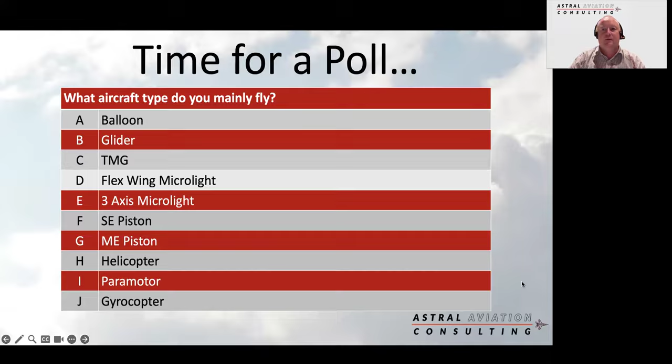Excellent. I know we had some questions as to whether the gyro flying aspects might be relevant, but as I think I corresponded with some of you by email, for some of those other types, the startle factor stuff is still really, really relevant to you flyers out there. So it's great to have you with us this evening as well.

Without further ado, I'm going to hand over to Greeners to talk about flight upsets, and I know he's going to start with another poll as well. Thank you very much. Well, let's have a look at the poll then, shall we? So

To start off with, we're talking about flight upsets, but what do we understand by flight upsets? What is a flight upset? So there's a bunch of questions there. Is it where the pitch attitude exceeds large degrees of nose up or nose down? Is it where the angle of bank exceeds 60 degrees? Is it where the aircraft is about to stall or has stalled, or any time the airplane isn't doing what you expect it to do? Now, there may be a perfect answer to this, or there may not. So what I'm really interested in here is generating some thought about this. So please put down whatever you think is the most appropriate response.

So I feel there should be some background music, maybe some Top Gun stuff. I don't know. Maybe that's not appropriate.

So looking at the results there, it's a really interesting one, because when people started talking about flight upsets, there was, in a document called the Airplane Upset Prevention and Recovery Training Aid version 2, a set of definitions about what constituted a flight upset. And those definitions were outside of 45 degrees angle of bank, more than 25 degrees nose up, or more than 10 degrees nose down. But the difficulty with that, amongst other things, was that if you're in that V-shaped box, it suggests you can't be in a flight upset.

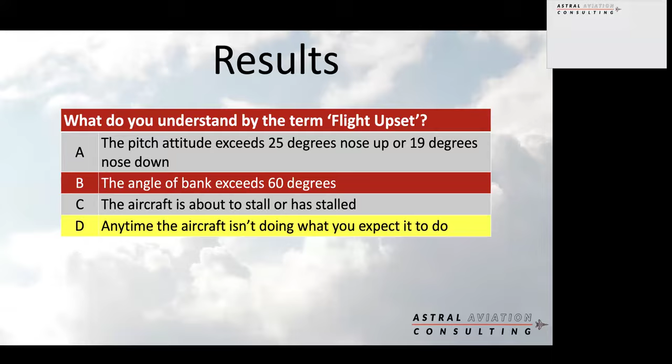So as GA pilots, all of those things might constitute a flight upset. If the aircraft is about to stall or has stalled, it may well be a flight upset. The presenters had an interesting debate about this. I've got to grab my airplane now, sorry. The bottom line is, an airplane flying along straight and level might be in a flight upset if that's not what you're expecting the airplane to do. So really, we define a flight upset as any time the airplane isn't doing what you expect it to do.

For aerobatics, if you're exceeding 60 degrees angle of bank, it's not a flight upset. If you're practicing a stalling exercise, it's not necessarily an upset. Although if you're not expecting the airplane to be stalled, then it is a flight upset. But basically, anytime the airplane isn't doing what you expect it to do. Thank you. Okay, and that's using that definition.

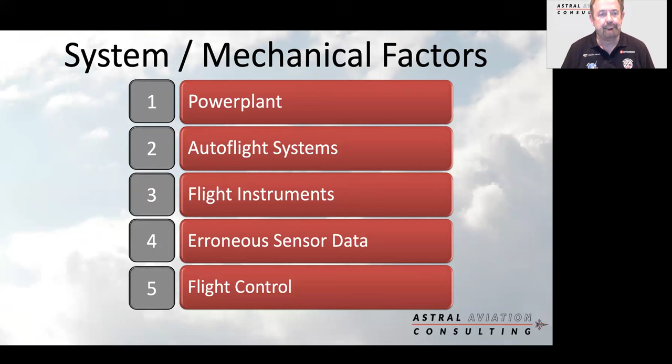And then finally, and the biggest set of potential causes of flight upsets, are human factors. This probably causes the bulk of flight upsets for us as GA pilots. So system alerts, disorientation, loss of situational awareness, passenger distraction or interference can be a big cause of potential flight upsets. Fatigue, overload or complacency, sort of 3 different categories grouped together there. But yeah, fatigue is an issue in our world as well as it is in the commercial world. And lack of understanding of angle of attack. Now, this last one in particular is one that's going to ring a lot of bells, hopefully, for people.

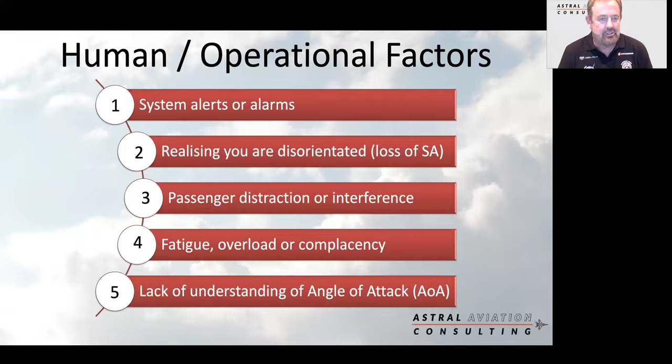So let's talk about what is angle of attack. So angle of attack, as I'm sure everybody in this webinar is fully aware, is where the relative airflow meets the mean chord line of the wing. And aeroplanes don't stall at a particular speed. They stall at a particular angle of attack, and sometimes speed can largely be irrelevant. And the airplane doesn't care what the attitude is, it's only concerned with what the angle of attack is.

Okay, so this is a lovely chart. This is from the Airplane Upset Prevention and Recovery Training Aid version 3. We've got 3 airplanes here at the same pitch attitude. The middle airplane is flying straight and level. It's got an angle of attack. The airplane on the left-hand side is climbing, same pitch attitude as the middle airplane, but it's got a smaller angle of attack. And we can have a long chat about that, but basically the relative airflow is now kind of coming from above the airplane. So the angle of attack is less on that climbing airplane than it is on the straight and level airplane.

But the really important one is the airplane on the right. That's a descending airplane, again, same pitch attitude, but because it's coming down, the relative airflow is coming from underneath the wing. And so the actual angle of attack is bigger than the other 2 airplanes. So that's really important to us. If we're descending and we've got a high angle of attack and we're in a stall, then we might have to make a very large change to the pitch attitude to get the angle of attack to a position where the airplane is actually flying effectively again.

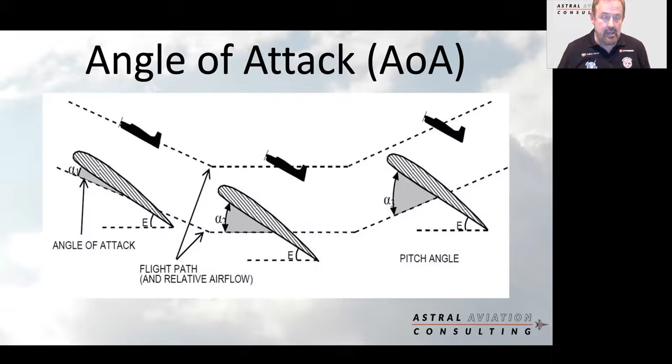So, just to finish off this little piece here, what is the largest cause of fatalities in general aviation? Well, it's what we're talking about tonight. It's flight upsets resulting from loss of control in flight, by some margin, and it has been for a number of years. Okay, so some of the stuff we're going to talk about later on, again, it's a gallop through because we're not spending a huge amount of time on this. When people come to us for their GA UPRT courses, we'll probably spend 4 or 5 hours on the technical knowledge side as well as the time in the airplane.

But loss of control in flight is the largest cause of fatalities in general aviation. So that's really important. So this whole session we're talking about tonight is absolutely critical. Thanks, Matt. Great, thank you. Really great scene setter there.

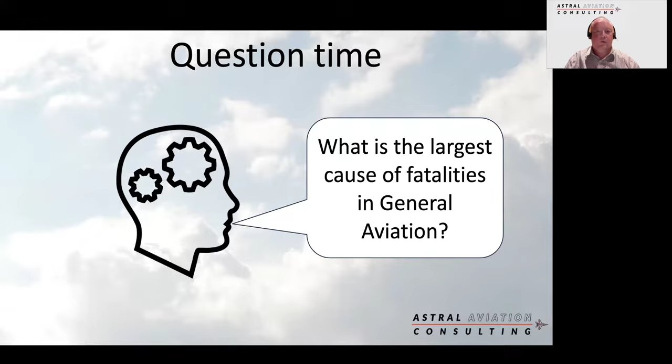Thank you very much. We're now going to move on to Nigel's talking about how to stay in control. And we're going to look at some startle factors, so that'll be really interesting as well. And then looking about what happens if it all goes wrong, that far right hand side of the arrow as Mark showed us. But Nigel, over to you.

So how to stay in control. So in our usual way, we're going to start with a quick poll, and we're going to come back to this particular poll. So let's have a look at this question then. So when turning base to short final, the tailwind on base leg results in the aircraft going through the extended centre line of the runway. So what's the best course of action to take? Bear in mind, we're on final to land here.

So do we increase the bank angle to tighten the turn back to the centre line? Do we increase the rudder application to tighten the turn back to centre line? Or do we do both of those things? Or do we roll the wings level and go around? Okay, so like I said, a practical question, and let's just see what people have come up with then. So let's have a look at the answers,

and they are good. Okay, so the majority of you have gone to roll the wings level and go around. About 22% of you have said C, you do both A and B, and a minority of people have done just the individuals of rolling or applying the rudder.

So the correct answer, of course, is we should roll the wings level and go around, because if we do A, that's going to increase the load factor, which is basically going to increase the angle of attack that Greeners has just been saying. B is going to provide us with possibly an out of balance turn, so we're going to introduce yaw, and if you do both A and B together, worst case scenario is you're going to spin. Okay, so D is actually the correct answer there. We should not attempt to get back onto the centre line. We need to keep in control.

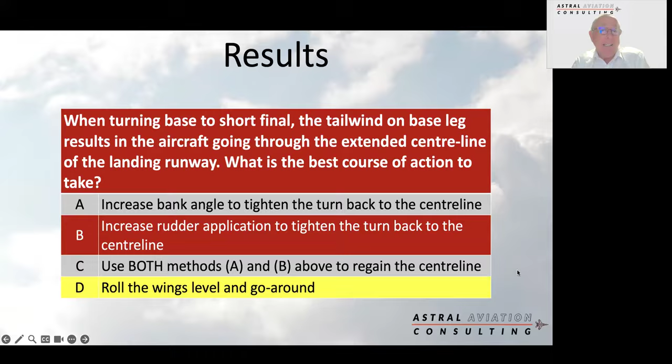So let's take a look at the best ways of doing that then. So like all good things in aviation, if we follow good procedures, then we're less likely to find ourselves in a bit of a pickle. Okay, so we're going to quickly chat about situational awareness. We're going to talk about work cycle. We're going to talk about energy state awareness and angle of attack. Well, Mark Greeners has just talked about that really, so we'll be talking about what energy state awareness means, and a bit about decision making and some prioritization.

So let's take a look at the first one of those then, situational awareness. We have chatted about this before at various points on our seminars, but so what is situational awareness? Well, put simply, it's having an accurate perception of everything around you. So how do we do that? Well, that's helped by planning ahead, listening to what's going on, feeling to a certain extent what's going on, and looking at what's going on. Looking out has been a good example there for VFR GA pilots.

Think about the what ifs. Aviation's got a special name for that, the what ifs. It's called threat and error management. It's basically a risk assessment. That's just another name that aviation uses for it. And then think about the what's next. So fly the aircraft, but think ahead. Things like, how am I going to join the circuit? So all of these things mean that we're not going to do something impulsive.

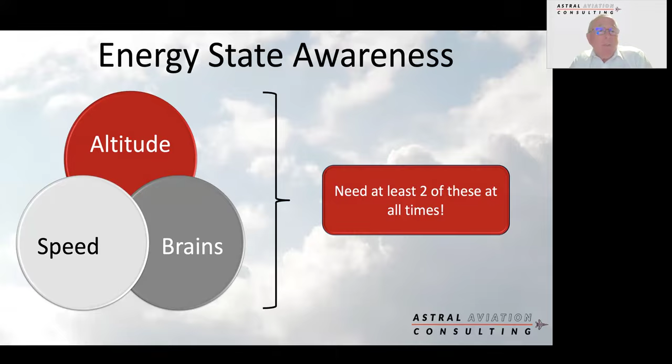So just before we move on to the next session, let's have another quick poll. So this one's an interesting one. For those of you that fly an aircraft with an autopilot or an electric trim, how many of you have an item in your vital actions prior to departure checklist, those last things you do before you depart, that identifies the controlling circuit breaker for either the autopilot or electric trim? So the answer is yes, you do have a checklist that says that. No, you don't, or perhaps you don't fly an aeroplane with autopilots or electric trim. So hopefully that's pretty quick to answer. So let's have a look at the results then.

Okay, so there's a fair number of you, 62%, who don't fly an aeroplane with that equipment. Okay, that's the majority of the people. Of those left, 26% say you don't have a checklist that does this, and then only a very small percentage, 11% of you, say that you do. So what we're saying there is just an example of coming to terms and thinking ahead about stuff so that we don't have to end up dealing with an out of control situation.

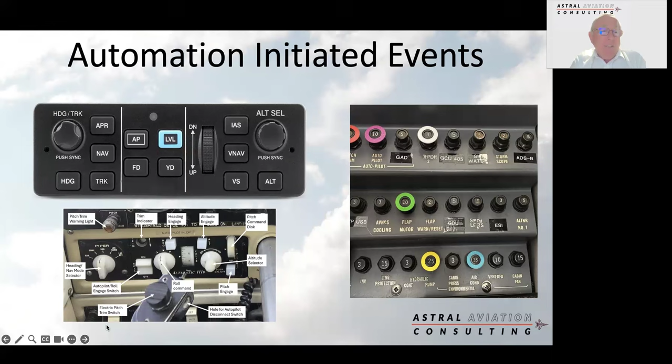So let's have a quick look at decision-making and prioritization. We've talked about cognitive bias, really, and just to come back to that, cognitive bias is stuff that affects our normal decision-making, and the thing that gives us poor performance in that area, if you like, is confusion. That happens because we've got poor situational awareness, ambiguity, poor communications. Typically, that's in a multi-crew environment, but I'm sure Greeners is going to talk about that when he talks about the commercial aspect of this, just for your interest as a GA pilot. Poor comms can also be poor RT and confusion between RT and ourselves.

Memory lapses, that comes from poor briefing. If we've revised this vital information just before the flight, these key pieces of information like where the circuit breaker is, okay, then we are briefed appropriately. High workload: when the unexpected happens during a period of concentration, such as pre-landing checks, that's when it comes as an even bigger shock. And again, we're going to talk a little bit about startle factor later on too. Urgency is another one, where time is a pressurizing factor. Maybe we need to meet our slot time for a departure or for a landing, so we're rushing. Okay, that does not help anybody.

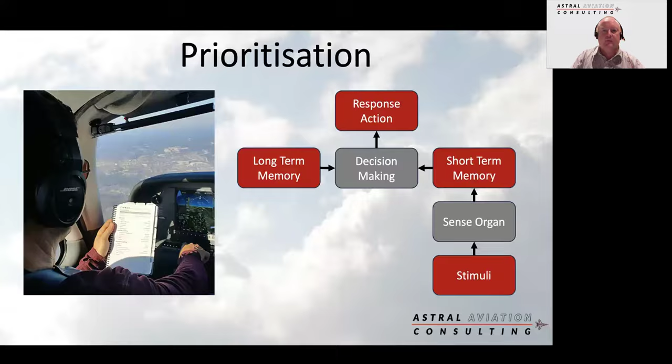So Startle, for me, this is the critical part of the whole session this evening. By far and away the most important factor to take on board. Startle is a killer. I think we're just scratching the surface here, and I think the industry has done itself something of a disservice by referring to this issue as Startle, because Startle sounds a little bit soft and fluffy. It's the sort of thing that happens in a horror movie. But make no mistake, this by far and away has the potential to be the biggest killer here in terms of the impact that it has on us.

And very quickly, what's the difference between startle and surprise? Surprise is when you go to your home and you find that a friend has thrown a surprise birthday party. Startle is you're walking through the door and a whole bunch of fireworks and explosives go off behind you, and for a period of time you're unable to deal with what's going on. So what is Startle Factor?

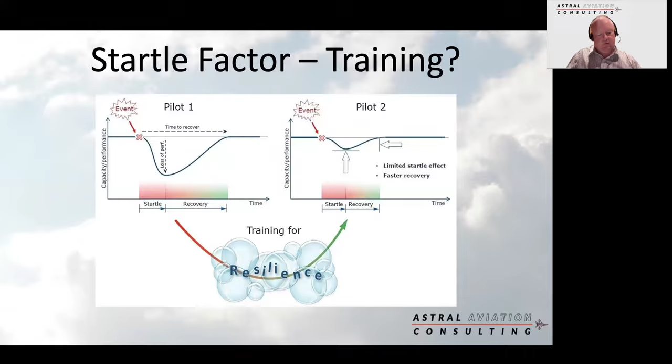What we're going to do next is move on to what to do if you end up out of control. And then we're going to look at some of the commercial UPRT, just a bit of interest in there as well. Another poll just to keep you interested before I do this next section.

So question here, if we can have the questions up, please, Sophie. What does the bottom of the white arc on the ASI, airspeed indicator, indicate? What do people think? Flaps limiting speed, flaps up stall speed, flaps down stall speed, or the rotate speed. I'll give you a freebie hint as well. Any of you that are doing FI or CRI courses or thinking about this, you'll do questions like this. It's definitely the kind of thing you can read up on before doing your courses and save yourself some stress. But let's have a look at the results, please.

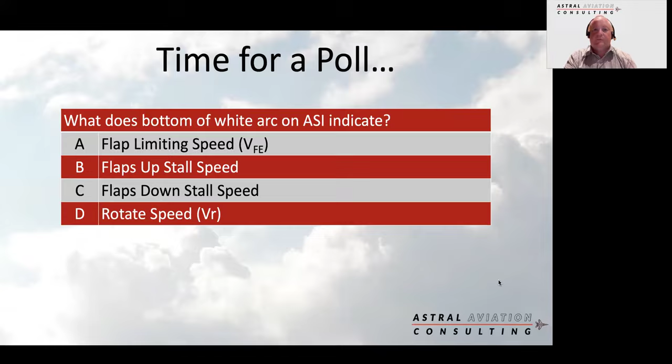Okay, so we've got a bit of a mix of results. The actual answer is C. It's the flap down stall speed, and that's in the landing configuration. So actually, it's well worth going and having a look at your ASI and the markings and just refreshing yourself as to what they all mean. There's actually some really interesting information on there as well.

I was doing a test on an aeroplane that was a single, but it had a blue line marking. Now, most people flying twins are familiar with what the blue line is, but there was also a single with a blue line marking on there as well. So here you go. If you're bored or struggling to think, you might go away and do some research. What do you think that meant? Or we can give you the answer at the end.

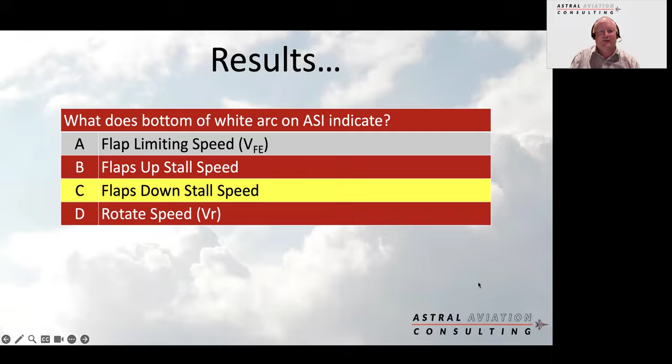So what to do if you end up out of control. Now, let me be upfront and clear. What I'm going to discuss here is the current training advice from the CAA. Some of you may be aware there are ongoing discussions about potentially updating and evolving this advice, and you may have been involved or may have heard about this as well.

And I was at the CAA Senior Examiner meeting in September, and we did discuss some thoughts. I know Greeners has been quite involved in staffing some thoughts, and Nigel has as well. And I think we may see some evolution of how we teach and train some of the stall exercises in UK GA, which is going to be a good thing, but that work is still ongoing. Mark will discuss some of the UPRT techniques, but for now, let us keep the current teaching and concepts separate from that evolution discussion.

And I'd just like to observe here as well, many people are just trained for test, and then they forget the different stalls in the tests and why they're there. What we're also looking to do, and we're really trying to encourage for the instructing and examining community, is to move away from stalling being an academic exercise and move it into scenario based. So we actually see what scenarios, what situations are you going to face in real life, and how can you handle those? So this is an area that I think we can all have a think about and practice in the instructing and the flying community.

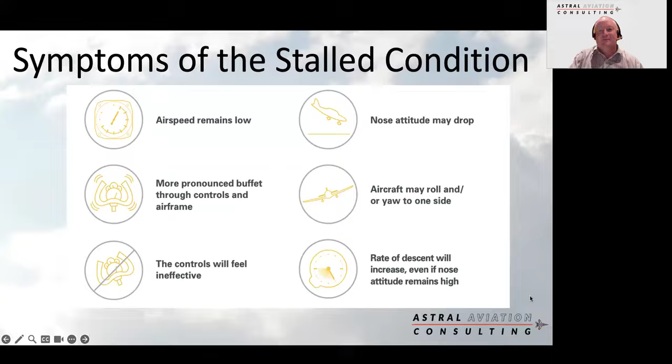Okay. Lots of people commenting on the question on the ASI as well. Yeah, this is good. It's good debate. Beginning of the white arc, or bottom. It just shows how language can be misinterpreted. So it's a good debate for FI courses and for instructors and trainers about how it can be misinterpreted. So yeah, I absolutely recognise and accept the comments on the question. Thank you.

The standard stall recovery. Okay, so the way to recover from a basic stall and regain full control, as Green has said, is reducing the angle of attack below the stalling angle. We've got to do that by moving the controls forward to select a lower nose attitude. And how much to lower that nose is going to be learned by practice.

Now, this is going to help regain the indicated airspeed, but it's also going to lead to a further height loss. So what we are looking to do is minimize this height loss and regain full control and flying speed. And we do that, or we teach that routinely now, by increasing the power as the angle of attack is reduced as well. And then we can ease the aircraft out of the descent. And this is what, in the training environment at the minute, everybody generally refers to as the standard stall recovery.

Now, the above signs and symptoms that we discussed apply during level, unaccelerated flight. During turns or higher G loading, there may be reduced warnings of the approaching stall. And you should take recovery action as soon as you recognize the signs of approaching stall, either from a warning system or other indications.

And the overall thing that we really want to get across here, and Greeners is going to talk a lot more about, I know, is we want pilots to be confident and able to recognize and recover and know how to handle the stall. It's not part of normal flying. So the aim is to try and avoid this in the first place, but we want to be confident and capable of dealing with it if we should experience it.

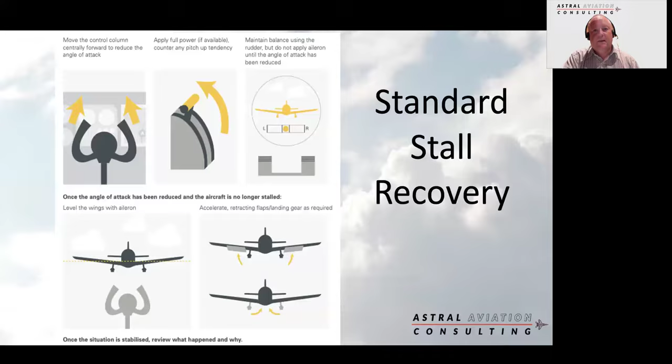Now, I also want to quickly cover unusual attitudes. What we're talking about here with unusual attitudes, I'm talking mainly about instrument and night flying. So when we're talking about unusual attitudes, I'm talking about the aircraft's not in the attitude that the pilot thinks it is or wants it to be in. Maybe a temporary loss of orientation caused by distraction during normal instrument or night flying. It might not be an extreme attitude, as Green showed earlier, but it's basically the aircraft's not doing what we want it to do.

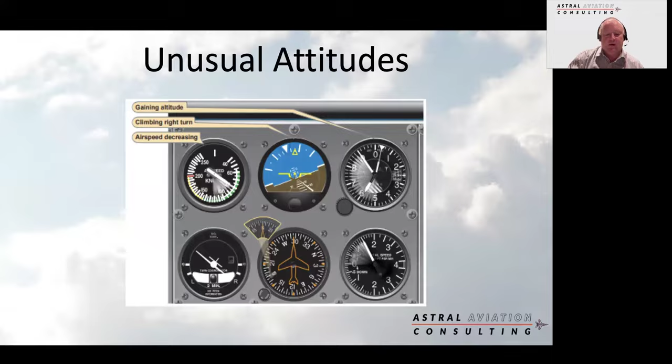So in instrument and night flying, the most likely reason for being in unusual attitudes is inattention to attitude control while carrying out cockpit tasks. Less likely reasons are an insidious technical failure that's gone unnoticed or inadvertently entering cloud. But with regular visual checks and procedures like Mark and Nigel have both covered as well, that's less likely. So it's distraction, inattention while doing other things, certainly in that night and instrument environment.

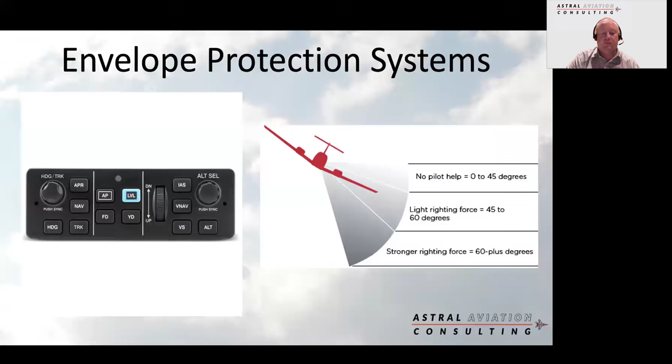But they're now becoming more and more common in some of the lighter end general aviation aircraft as well. Some of the higher end microlights, even some of the permit aircraft, we're now starting to see these technologies trickle down into those as well. Really, it's all about ground study, really understanding what are the parameters, how does the system work, how can it help you, and how can it potentially mislead you or give you problems. So here's just an example of some of the ones that are out there as well.

I should also mention ballistic recovery systems. They're obviously becoming more and more common in lots of light aircraft, like I say, all the way down from EV-97, C-42 microlights, and obviously some of the higher end aircraft as well. This is another consideration. It's another thing in your toolbox, to use the cliche, that you could use in a loss of control event. And we can perhaps discuss this a little bit more in Q&A.

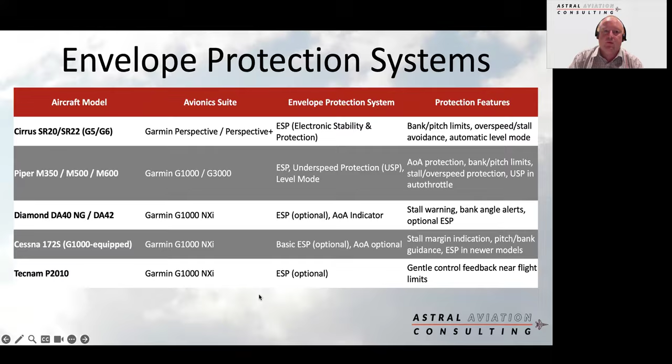If any of you have ever gone through or been involved in the Cirrus training, they have some really rigorous training and recommendations in how they bring CAPS, which is their ballistic recovery system, into the thing, and they put it in a real procedural, really SOP drilled manner as to how to appreciate their system and when to use it, which is really interesting to read up on, even if you're not going to fly one. It's something to think about for sure.